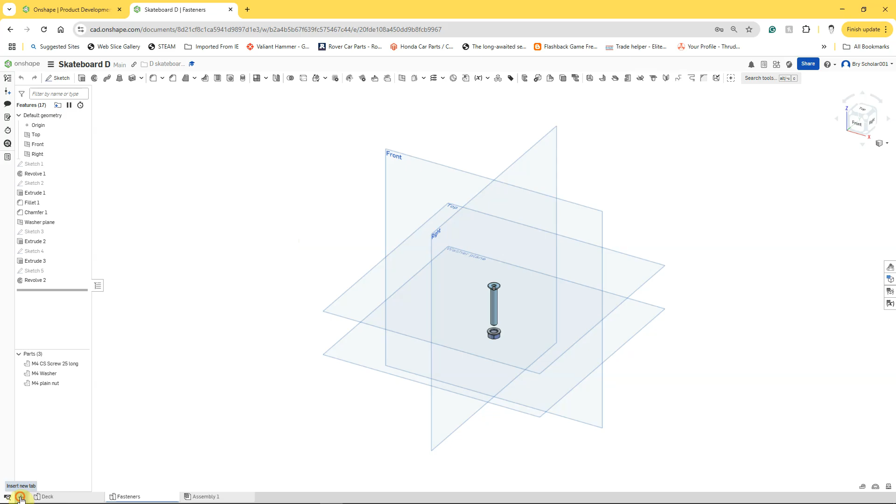Clicking on the plus sign bottom left of the screen, and then left clicking on create part studio, gives us a new part studio for the wheel and the nut. Right click on part studio 1, left click on rename, and we'll call it wheels. Remember, although our skateboard has 4 wheels, we only need to create one, and we can bring that into an assembly multiple times.

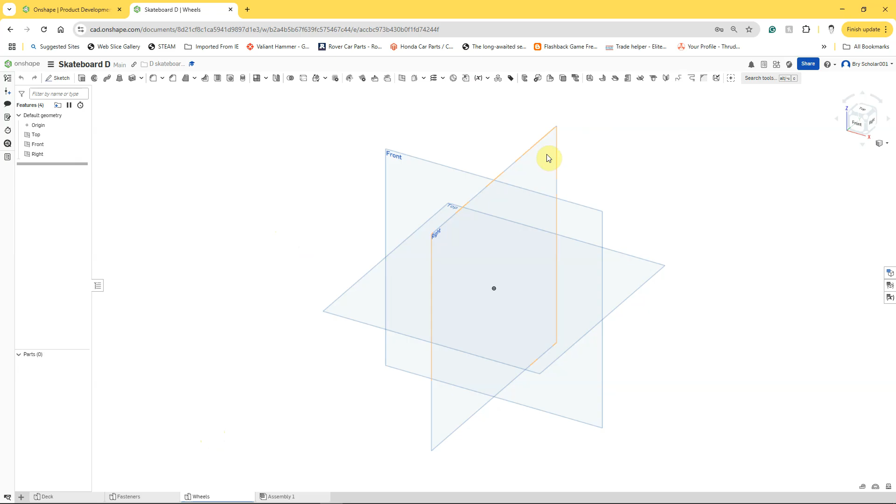We're going to be modeling on the right plane initially, so I'm going to hover the mouse so that the right plane is selected, right click, then left click on new sketch, then press N for normal to view directly onto that work plane.

We're going to start off creating a couple of concentric circles, so using the center point circle tool, left click to place the center on the origin, left click to place the diameter, left click for the center, left click to place the diameter or circumference, and then we will dimension those.

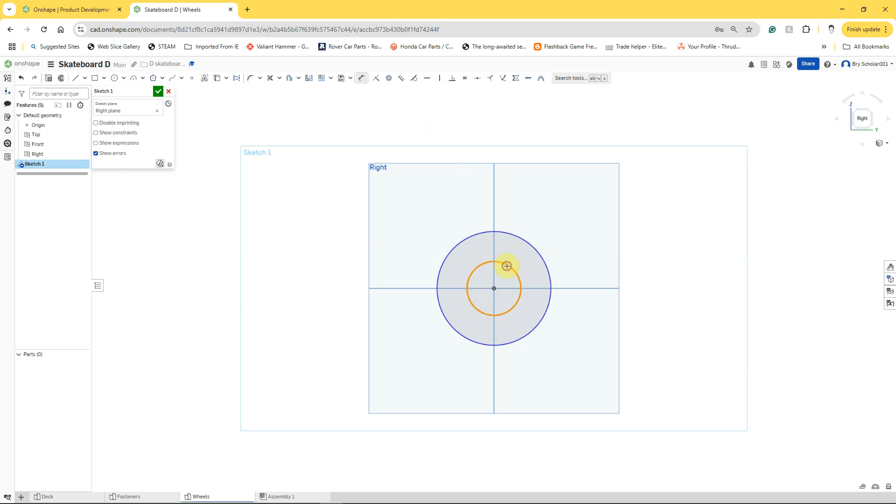We use the dimension tool, left click on the edge of the inner circle, left click to place the dimension, change it to 8 by typing in 8 on the keyboard and hitting return. The outer one, we'll do the same, left click and place, and this one is going to be 52 millimeters, so type in 52, and we'll just zoom in a little bit so we can see what's going on.

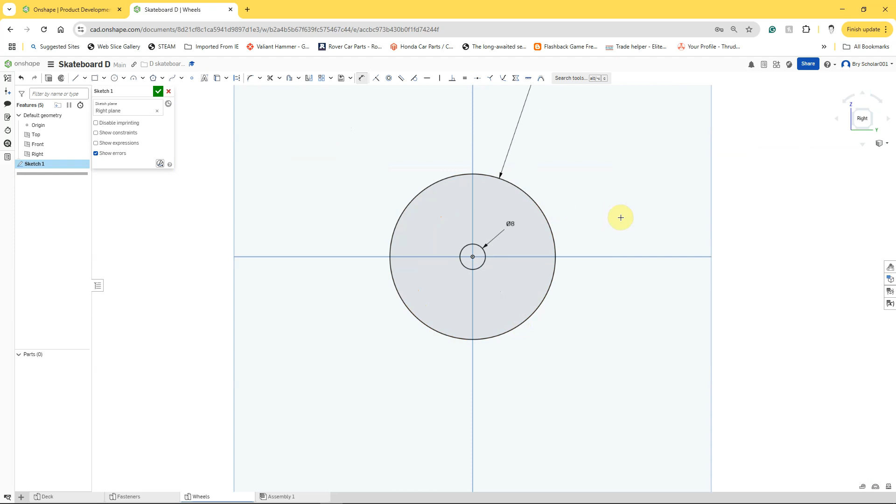That's basically the profile for our wheel. So we're going to extrude, and we're going to make that distance 32, and just hit enter to put it in. But if I hold the right mouse button and spin it round, you can see that it's come off to one side. So let's go symmetrical, tick the symmetrical box, and then left click. So that's our very basic wheel.

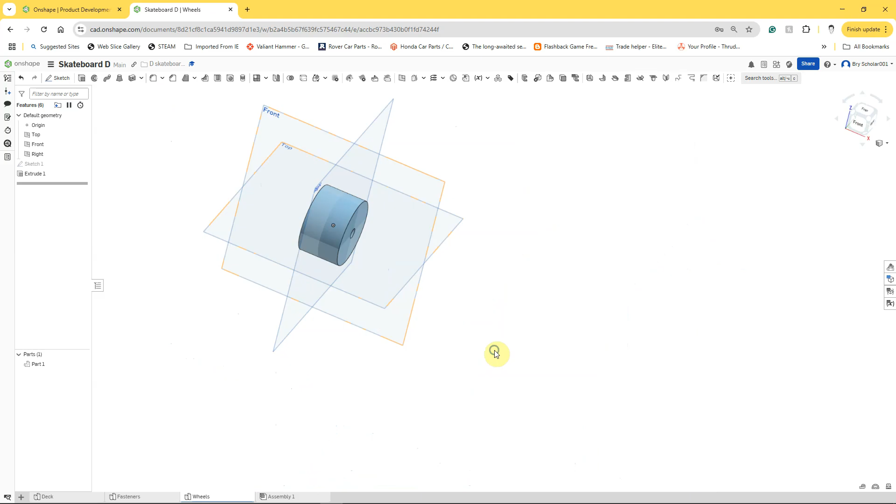In the C tutorial, and you're welcome if you're feeling confident with the software to follow it, for doing the wheels we actually create the bearings and the spacer, but for the D tutorial we're simplifying this a little bit. What we'll do is recreate the slight impression on either side to allow for the bearings, which are pushed in slightly narrower than the wheel.

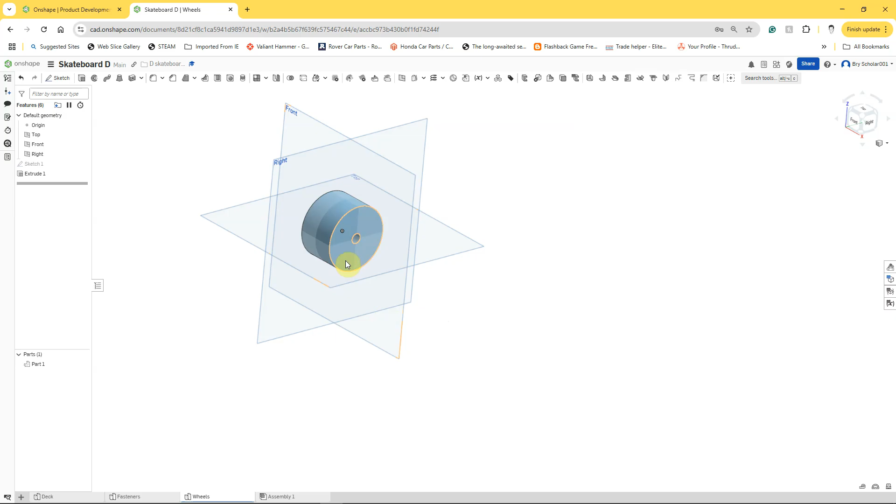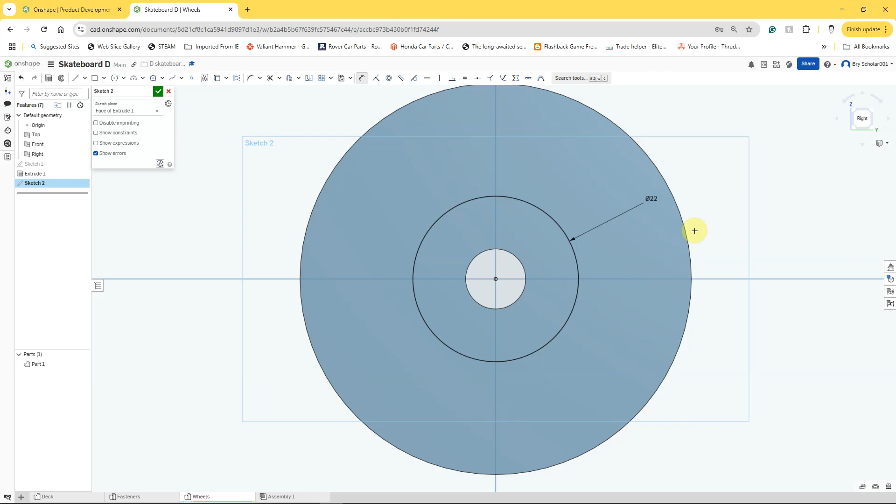On this front face, I'm going to right click, left click on new sketch, then press N normal to, and I'm just going to pick a center point circle again and line that up with the origin. I could zoom in a bit to make it easier and just drag that out. I'm going to dimension that circle 22 millimeters, using the dimension tool and typing in the number.

I'm then just going to remove the material that equates to the thickness of the bearing that would be left, which is 4 millimeters. So I'm going to use the extrude tool, make that remove, and change the distance to 4 millimeters. Type in 4 on the keyboard, hit return, and then left click to tick it.

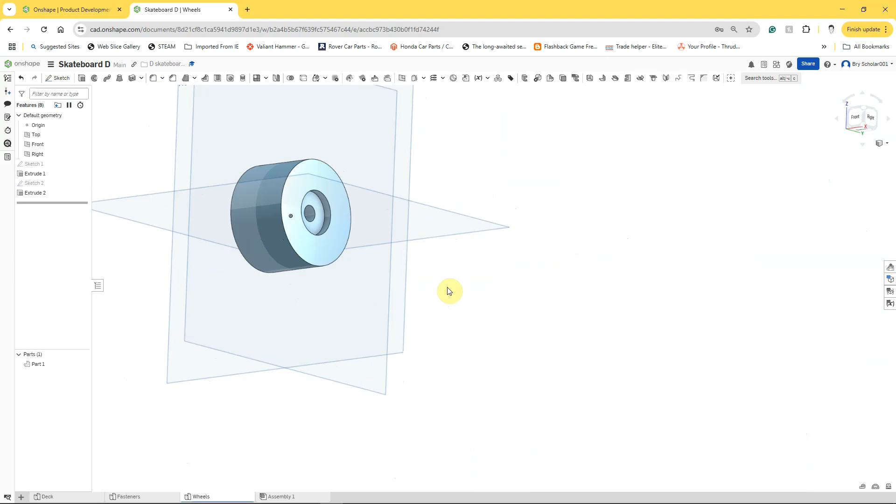Now that recess is actually on both sides, so what I'm going to do is mirror the feature. I'm going to use the mirror tool. In the past we've used the mirror sketch tool, but here we're going to use the mirror feature tool. It defaults to mirroring a part, but we don't want to mirror the part, we want to mirror the feature that we did. So left click, then left click again to select feature mirror, and I'll just spin it around so you can see what's happening.

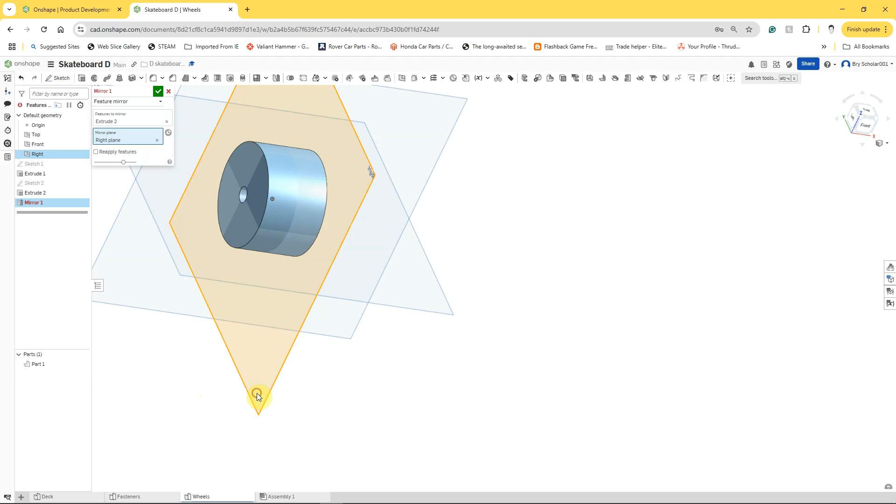So the feature to mirror is going to be extrude 2, and the mirror plane is going to be the plane that we drew it on, which is the right plane, and you can see it's come up red. If that happens, just left click on reapply the feature and then left click, and we've got our basic wheel profile.

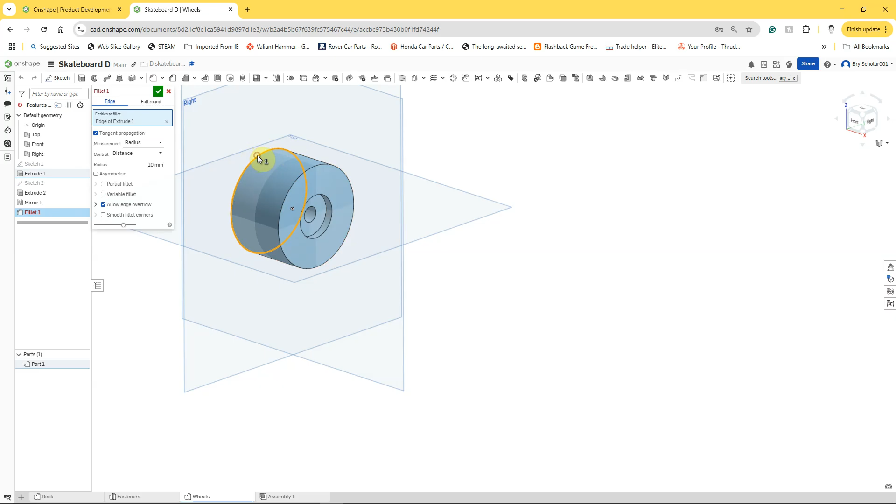Now our wheel isn't quite as harsh on the corners, so let's just add a radius on there. So we use the fillet tool, we'll change that to 10 millimeters, and we'll apply that to the back top edge and the front top edge. Left click, and we've got something that looks a little bit more like the wheels that you would have assembled on your skateboard.

The next thing we're going to do is we're going to create the nut that holds the skateboard wheels onto the trucks. So let's first of all start by renaming part 1 as the wheel, and then we'll create the next part.

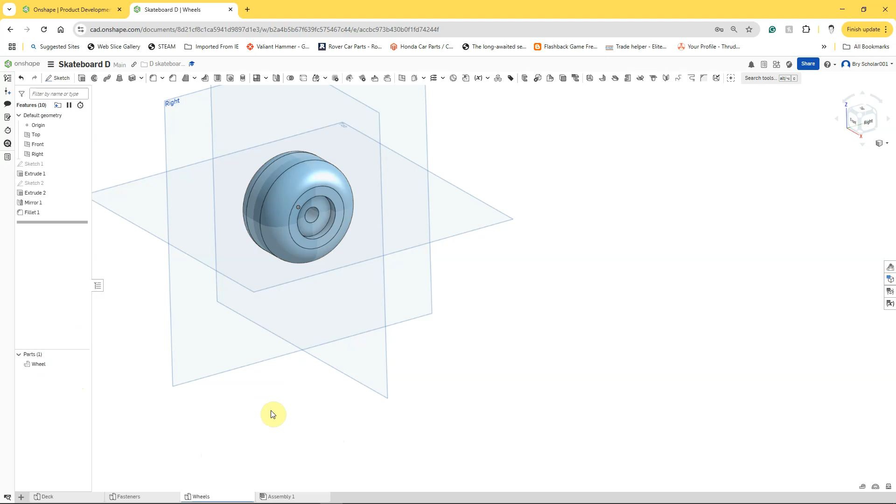So we're going to create a new work plane, and we can hide the wheel as well. So let's just right click on the right work plane, left click on offset, and we'll change that distance to 50.

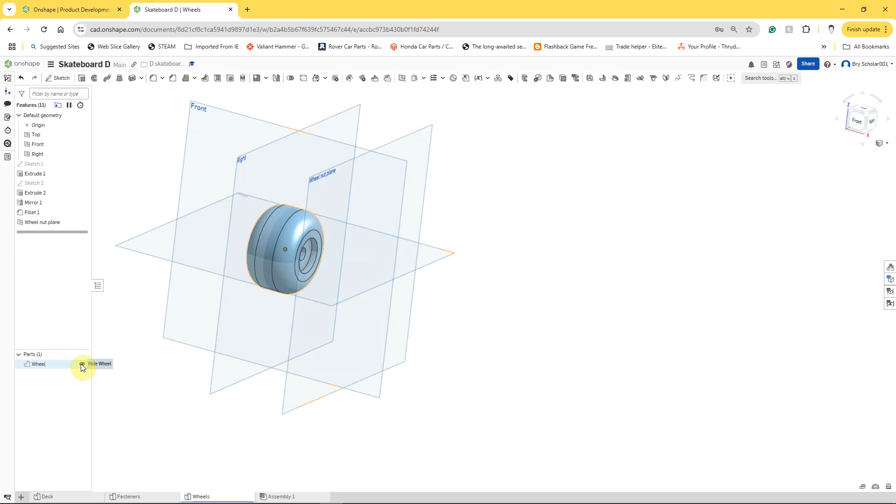I don't suppose it really matters whether it goes behind or in front of, because we're going to hide the wheel. But tick to create the plane 1, and then we can rename plane 1 wheel nut plane or something appropriate. And then let's just click on the eye by the wheel to hide that wheel.

So wheel nut plane, right click and left click on new sketch, press N to view to that work plane normal to it, and we'll create our sketch.

So we're going to start off with a circle to represent the thread, and we're going to create a polygon.

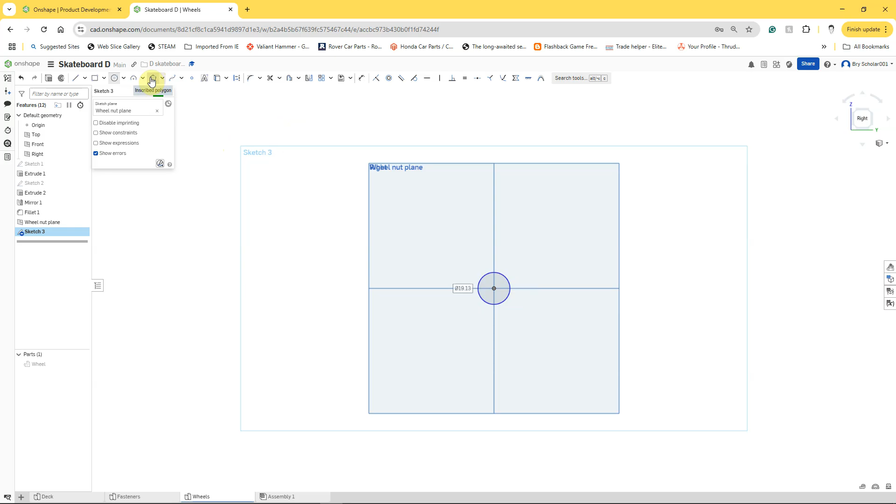So inscribe polygon again and click in the middle and place it. Don't forget to select the right number of faces, which you want to be 6. Left click once we're happy with that.

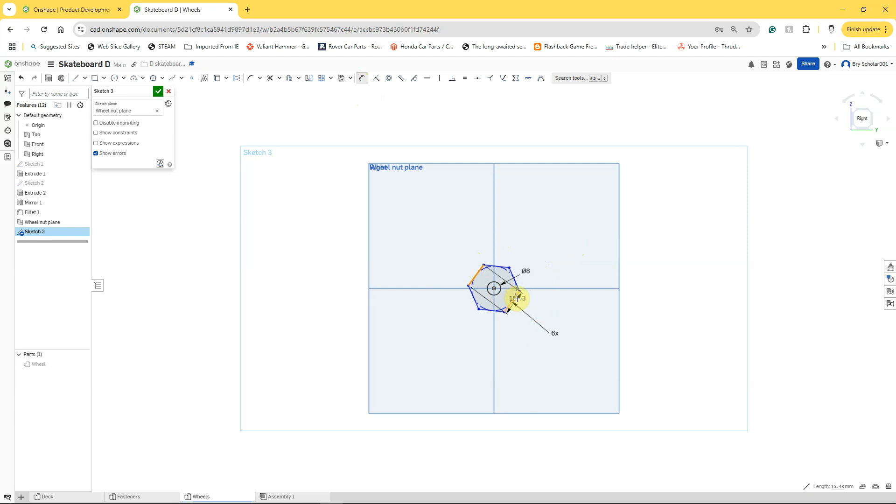Let's add some dimensions. So that inner circle wants to be 8 millimeters, and our nut wants to be 14 millimeters across the flats. So select the 2 faces, left click to place it, type in 14.

And as we've done before, we'll need to line that up so that we can put a nice chamfer on one of the edges of the nut. So let's create a horizontal constraint on the top one there, and that spins round quite nicely.

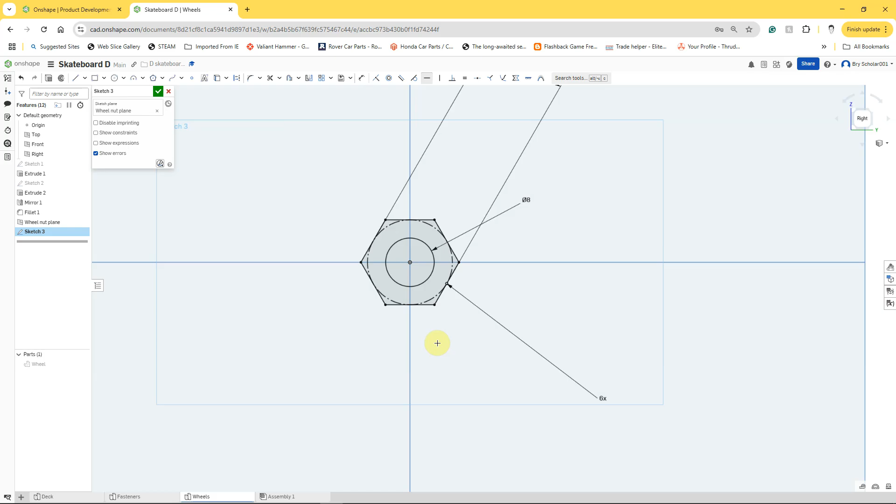So that's our basic shape for our nut. So let's extrude that, and we're going to extrude it 5 millimeters. So I'm just going to pull it round so you can see, and I'm going to make that 5, and there's our basic nut shape.

And again, if you wanted to keep things simple, you could stop at this point, but let's try and add a bit more detail, especially as it is a nut with a nylock insert. So you don't want this nut coming off, because then your wheel would fall off your skateboard, which you don't want to happen. So it's got a nylon insert into it, so it's a special type of nut called a nylock nut or a Simmonds nut.

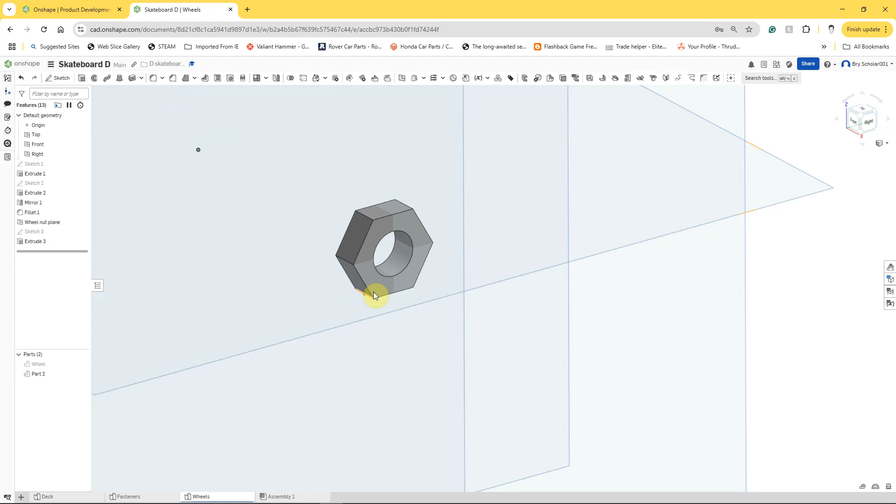Let's add that detail onto the nut. So on this top face, I'm going to right click, left click new sketch, press N for normal to, and we'll then create the next bit of our nut.

So we are going to create an outer edge of 14 millimeters. So we can use the center point circle, click on the center, and just come out until it touches the edge of the flat, and we know that's going to be 14 millimeters.

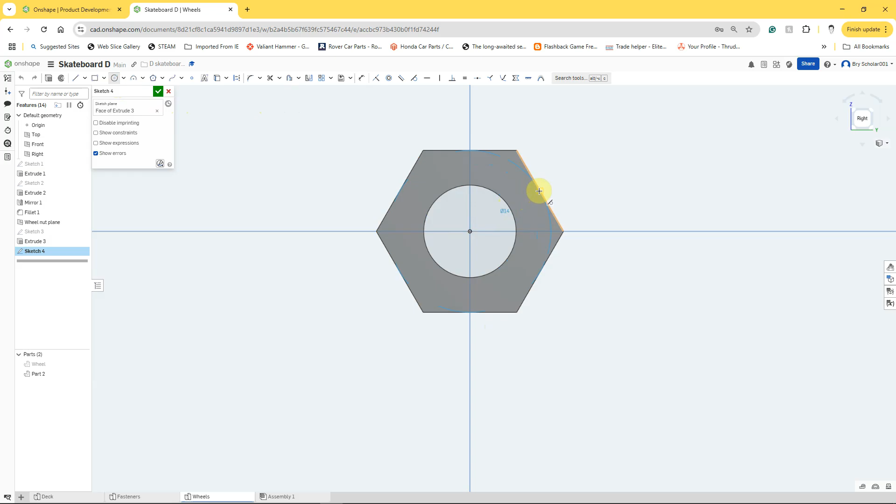So we've got that. And the inner part is going to be the same as our internal part. So we could draw another circle, but we could save ourselves a dimension and use the projector tool and just pick up on the inside edge and left click on that. So we now have our 2 concentric circles, but we've used our existing geometry to create those.

And we are now going to extrude those 2 millimeters. So use the extrude tool, and it's gone in the right direction. Let's just change that to 2, hit enter, and then left click.

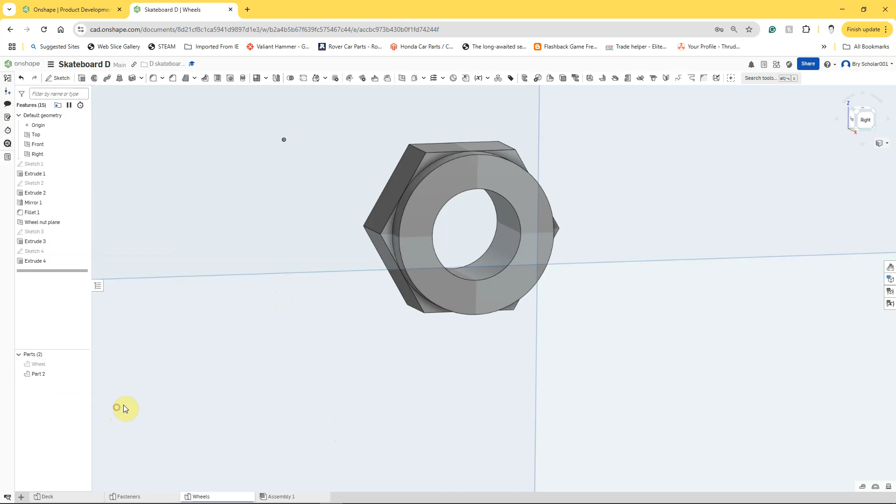Now the first thing we're going to do is put a fillet on this outer edge. So I'm just going to zoom out and spin it around so we can see. I'm going to add a fillet, change that to 1 millimeter, and put that on the outer edge there. And then left click, because we're happy with that.

And again, we could leave that nut there if we wanted to, but let's put the little recess on it that shows where the sort of the nylon of the nylock nut is.

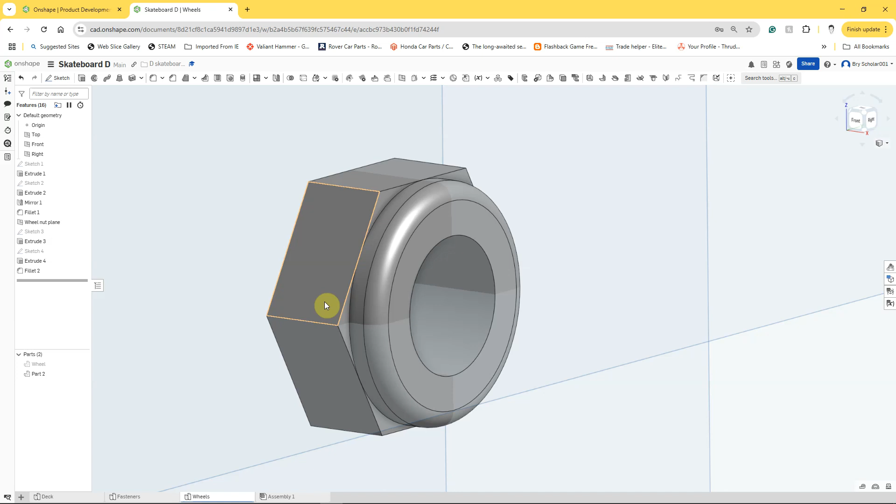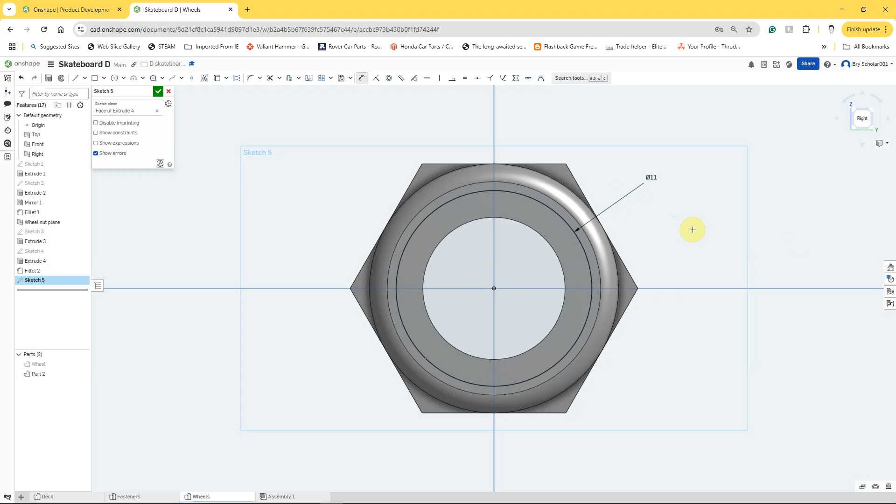So on this top face, I'm going to right click, new sketch, N to view normal on it, and then I'm going to draw another circle. Again, concentric, start from the middle, drag it out, use the dimension tool to dimension it, and we want that to be 11 millimeters.

And we're just going to go in 0.2 of a millimeter. So extrude, remove, and then change that to 0.2 on the keyboard, hit enter, left click, and you can see we've just gone in ever so slightly.

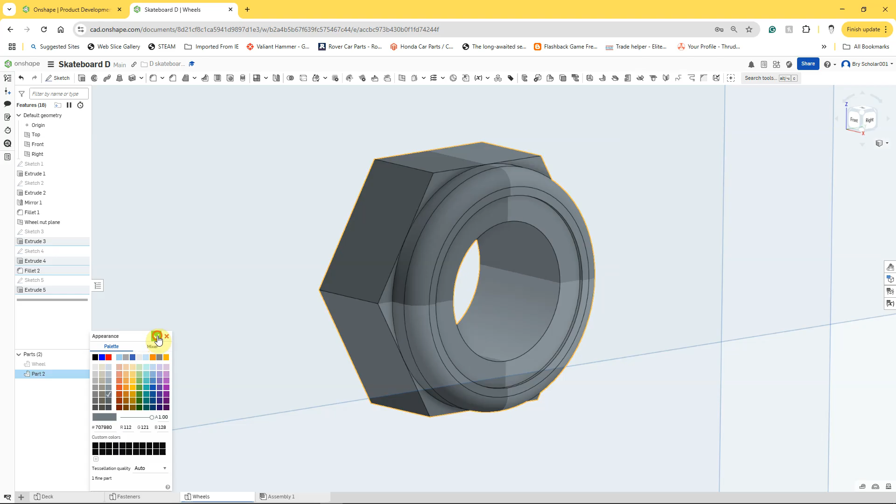Now this is actually quite a nice grey colour. I don't know what colour your model will have come up, but I'm going to edit the appearance of the nut anyway. So right click on the part, and I'm going to edit the appearance for part 2. We've not named it. Let's give it a kind of silvery sort of metallic color, look a bit like our chrome nut, and left click on that. And so I've changed the whole part, but I could also edit the color of a face.

So I'm going to right click on that face, and I'm going to edit appearance on face, or add appearance to face. And this time I'm going to pick a nice dark blue that looks a bit like the color we have on our nylock nuts. Left click, and that just gives us a nice representation of a nylock nut.

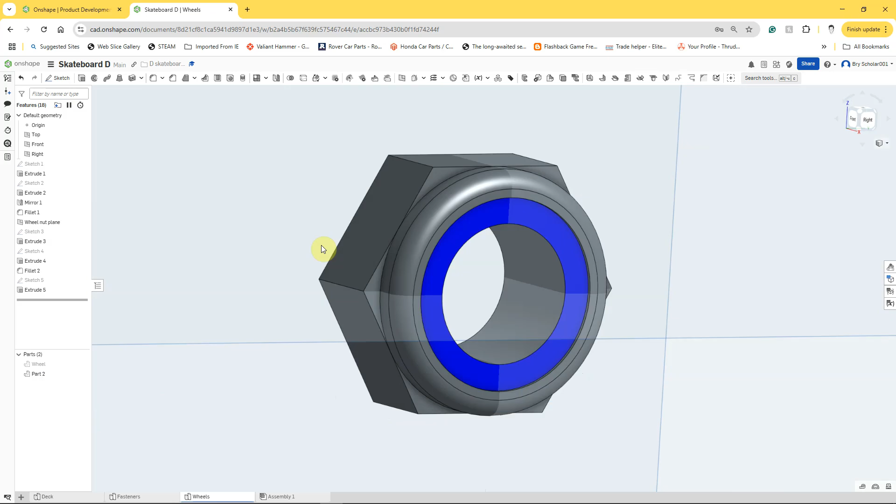It's not perfectly accurate. It's got no thread. You can't see the sort of the block of the nylon, but once that's in the assembly, you'll get the idea. Again, you can leave that as is if you want, but let's go and do what we did on the nut previously and put a little chamfer on there.

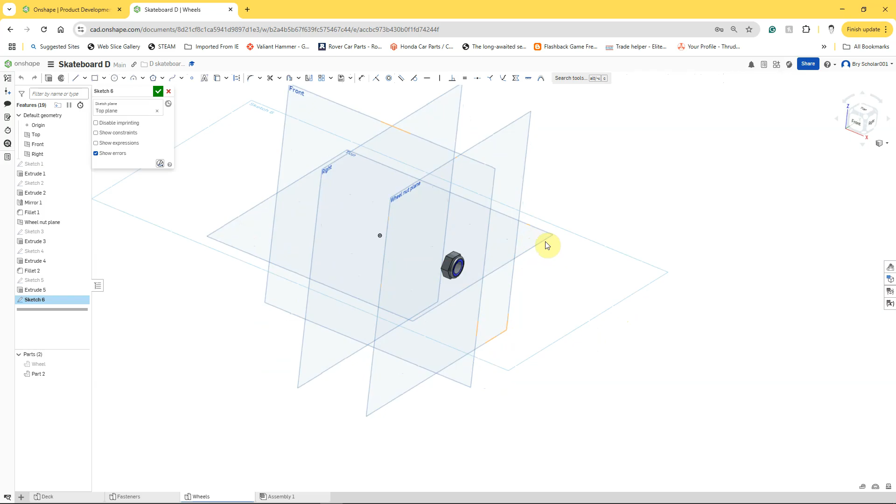So if we look at this, the top work plane is lined up with our corners. So right click on the top work plane, do a new sketch and press N, and we'll just do the same as before, but we're just going to keep it on the top surface on this one. So start with a construction line, so line and construction.

We're lined up with the origin. You can just about see the line changing, and I'm going to make sure that the middle of this line isn't in the middle of here like we had last time. Not that we're going to put another line in, we're just going to chamfer the top part, turn off the construction line.

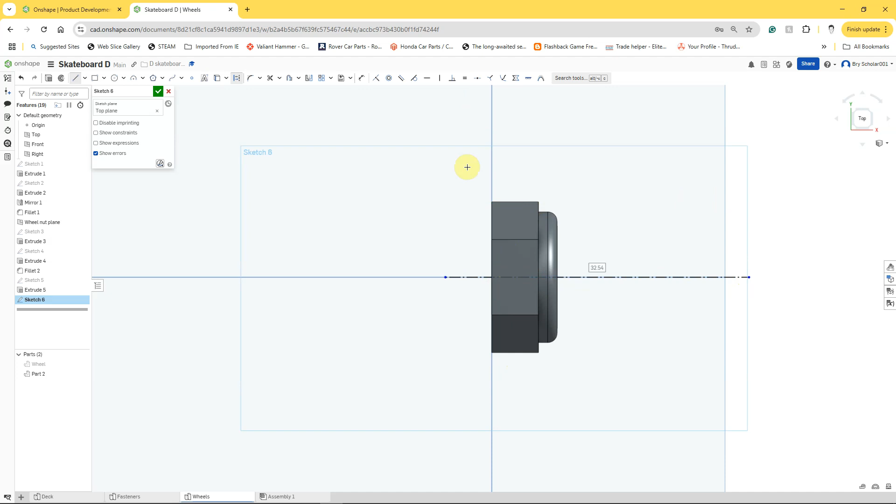I'm just going to zoom in now, and from the corner I'm going to draw a line, and then I'm going to come across, and then I'm going to go back to the corner. So we've got our little triangle, and I'm going to dimension that to be 45 degrees.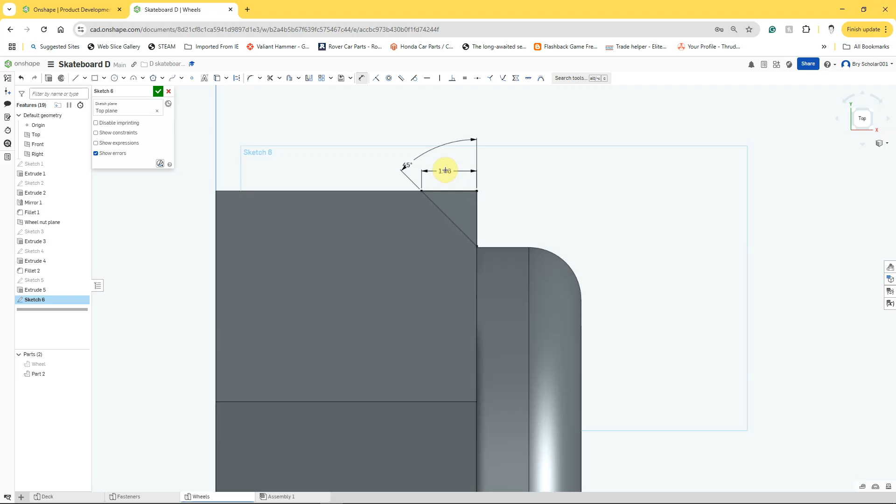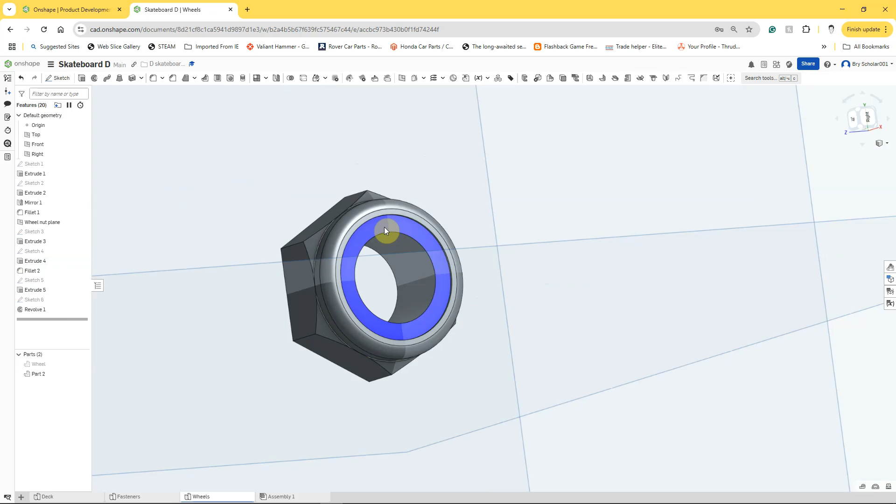And I'm going to dimension that line to be 1 millimeter, and then I'm going to do what we did before. We don't put one on this one because it's a sort of special nut, so let's revolve, remove. Our axis is going to be that little construction line, and the merge scope is part 2. It's auto selected it, so do that, turn around, and we've got our fancy nylock nut.

So let's right click on there, left click to rename it, and wheel nut.